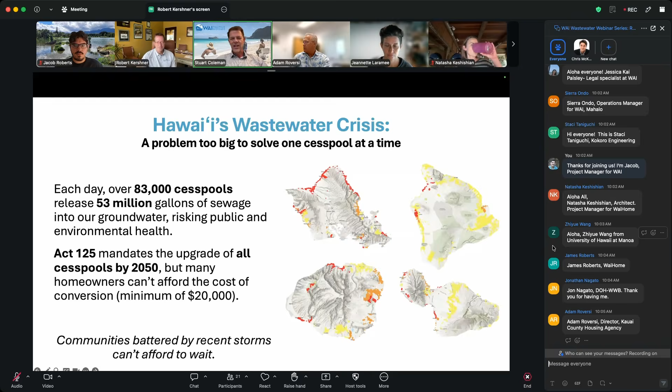Yeah, thanks so much, Stuart, and thank you just for the opportunity to present today. As Stuart mentioned, I grew up on the Big Island, so it's really special to be able to be here and just to share some knowledge and learn from you all as well.

So Rob and I at Innovatreat, we've been collaborating for the last couple of years on a project in North Dakota, the Teddy Roosevelt Presidential Library, which just opened up about a month ago.

Sherwood, the engineering company that I currently work with in San Francisco, we're the overall civil engineer for the project. So we led all of the site stormwater and also the design of the on-site wastewater treatment system.

And then Innovatreat supplied the in-building MBR system, which Rob will explain more about in the next several slides. At this project, all wastewater generated on site is treated to a level that can be safely reused, both within

The building for toilet flushing, as well as for irrigation around the site. And so, although this was developed for a much different context, obviously, than the situation in Hawaii, this type of

Treatment system is also very applicable for small communities that don't have access to larger municipal sewer systems.

So this is very similar to all of the small towns across Hawaii that are currently grappling with how to afford replacing over 80,000 cesspools. Can you go to the next slide?

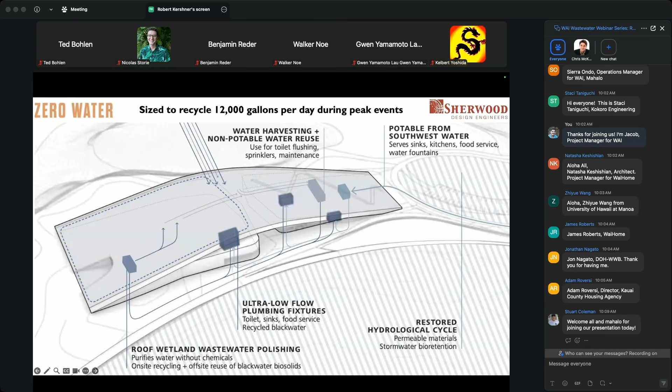As project site civil engineer, Sherwood designed all of the stormwater management and bioretention systems at the exterior of the building, including the green roof over the top. This was to enhance the site's natural hydrological cycle and really emphasize infiltration rather than runoff. We also partnered with Innovatreat to design the on-site water reuse system.

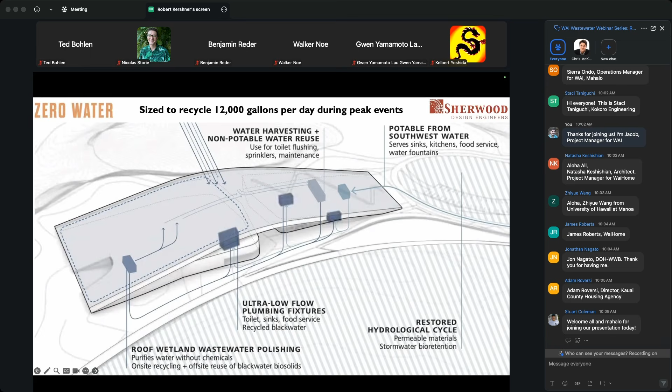All of the building's wastewater is collected and treated on site to disinfected tertiary recycled water standards, which is the highest level of effluent quality. It's then reused for toilet flushing within the building as well as for irrigation. Overall, this integrated treatment system is projected to reduce potable water demand of the library by over 50%.

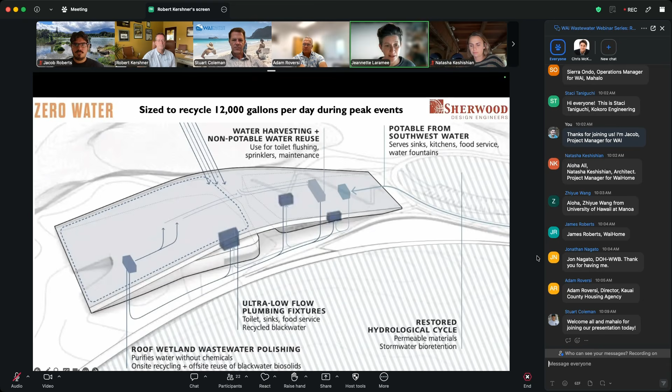And now I will hand it over to Rob to get into the details of Innovatreat's offering. Okay, thank you, Jeannette. Just to quick summarize who we are: we're based in the Baltimore suburbs. The technology, the MiniMBR as we call it, we developed over the last 15 years.

Strategically, it was developed to treat to super high levels of nitrogen and phosphorus removal because the Chesapeake Bay has been hampered by excess nutrients for decades. The state of Maryland passed regulations and, lucky for us, supplied funding, which I know you guys have been struggling with. One of the key factors to our significant success in reducing nitrogen and phosphorus was the funding mechanism.

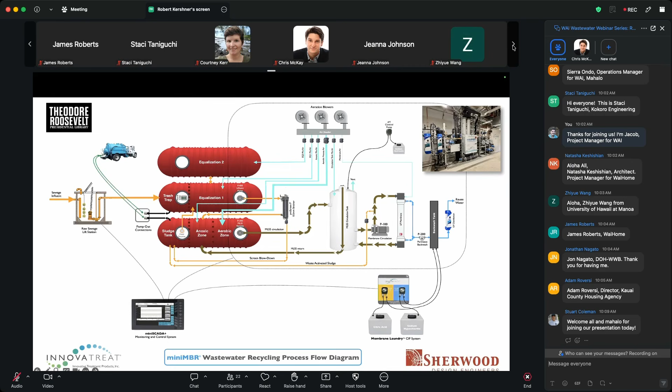All of the systems, the power, everything is minimized to meet the living building challenge that Jeannette described. We're talking about a system that draws maybe 5 or 6 kilowatts of power while it's operating.

So I threw this slide in because I want to very quickly explain for those who aren't wastewater nerds like myself, and I hate to say, Jeannette, you're a nerd too, along with me. We get excited about this industry and this business, but you can hit me later if you don't like that wastewater nerd conversation. We'll take that up over a beer.

It's clean, don't get me wrong, it's pretty clean. Most big municipalities do it this way. Some provide sand filtration or some other sort of filtration on the back end. It's what most municipalities do.

But when things are upset, when the bugs aren't happy, when toxicity hits for some reason, you end up with excursions in the effluent quality. So the whole point of doing water reuse is guaranteeing high level of treatment, and that's why the selection for a system like this incorporates a membrane, a permeable barrier to separate the effluent.

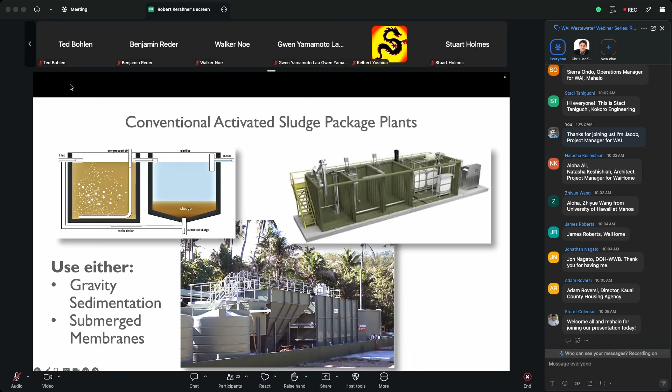My personal experience is that when we're working with developers, when we're working with homeowners, they don't want that in their backyard. It's just kind of an eyesore.

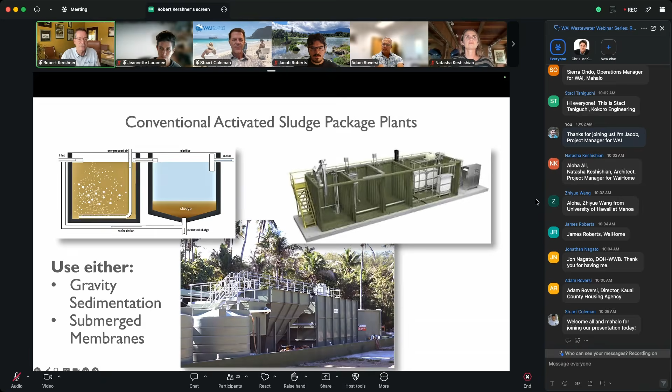Key to the technology, though, is in fact the membrane. And the membrane is also the, we'll call it, potential weak spot in the system, because if the membrane permeability, the amount of water that can actually pass through this membrane, if that fails or fouls, you'll get no water out. The flip side of that equation is all of the water that does pass through is really clean water.

So what we've done is we've taken a unique approach to the separation step in our process, and we've basically gone back to the roots of the early technology developed for industrial separation. This is a membrane, but not a typical municipal membrane. We took a robust industrial membrane that was originally designed for industrial waste separation, including oily, greasy waste, and repurposed it to separate the bacteria that we're talking about.

Big plants couldn't justify this because of the relatively expensive cost of this type of membrane. But in small plants that we're talking about, the membrane is a small portion of the overall project. So getting the more robust membrane that lasts longer and can take more abuse is a huge advantage to the longevity and the operating costs and experience in the plant.

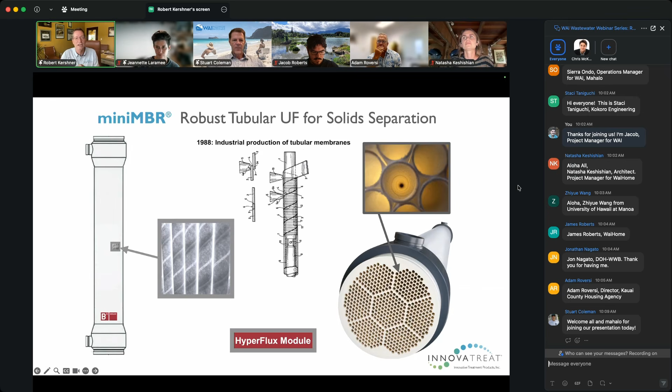So basically, we're talking about the separation being the most critical step. What we've done is we've extracted the membrane from the rest of the tanks, and that's why we're able to configure the plants in a very attractive manner, but also in a much more efficient manner. So this slide describes the layout of what the typical systems look like.

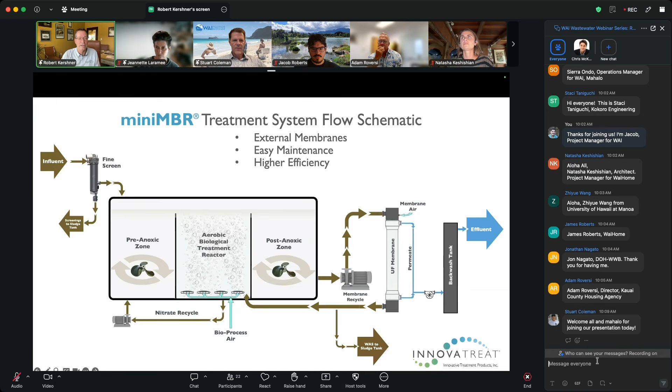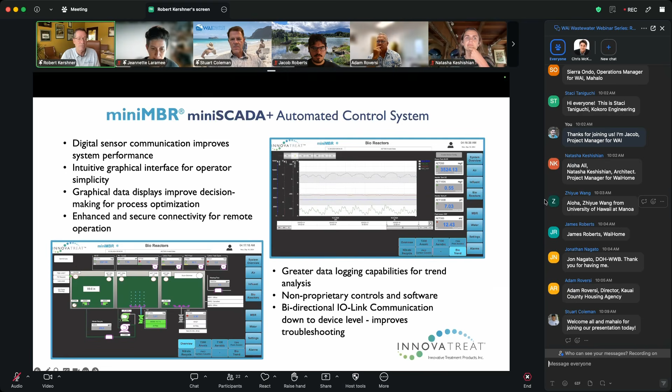All of our systems, and frankly, all modern wastewater plants require some level of automation and controls. Our systems utilize an open architecture Linux-based system, which if you're a computer geek, you'd understand is non-proprietary computer technology. That means it's not going to be obsolete in 10 years requiring software upgrades. All of that is taken out of the equation by addressing it with a non-proprietary Linux-based computer control system, which is what we've done.

Our systems are built in the factory right over my shoulder here, and that's actually a unit in the test bay that'll do up to about 30,000 gallons a day. You can see the two towers in the middle — those are the membrane modules. All of the equipment, the pumps, the blowers for adding oxygen air to the biological reactor, the controls, the membrane cleaning system, which is all automated — we call it our membrane laundry — all of that is incorporated in a pre-engineered, pre-tested, prefabricated skid system.

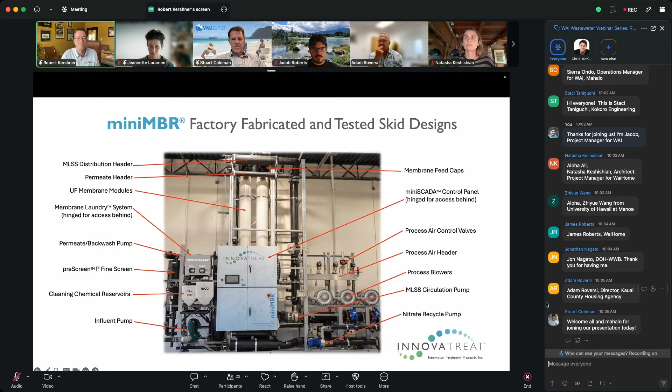We build these systems, especially for these smaller projects like the decentralized ones we're discussing here, with some unique features because we understand they're going to be remote. We understand they're going to be visited by, let's call it, a circuit rider type operator. We don't have a staff of 20 people running the plant 24/7 like a municipal plant. We don't expect that, so we need the automation to allow the plant to run 24/7.

But when a blower fails or a pump leaks, we want to be able to service them quickly. So we'll have a shelf spare sitting in the room, made to be very easily and very quickly swapped out with very simple tools. Within an hour of any piece of equipment having a problem, the system is back up and running. Of course, you get the alarm, you get the text message, and you're back up in operation in very short order.

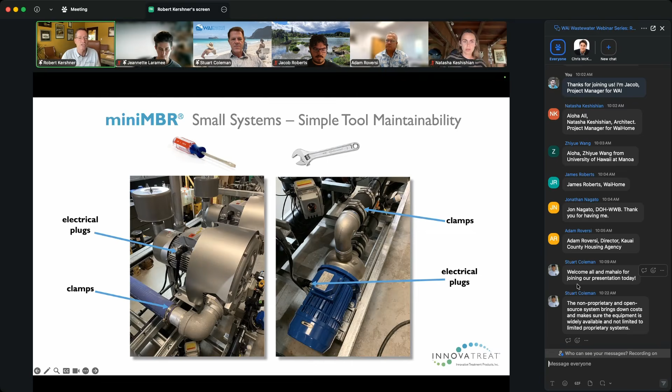So the systems that we build can be configured in a number of different ways. You've seen the pictures of the one at the Theodore Roosevelt Presidential Library, but if we were building a plant behind, say, a warehouse or in the corner of a shopping center, we could deliver it in something we refer to as a package plant.

Now, our package plants are built by us, however the fabricated structures are fabricated for us on the West Coast out of a technology called foam core fiberglass construction. This construction method is pretty slick in that it's corrosion resistant because it's fiberglass. It's built in the method that mega yachts are built — a foam core vacuum resin transfer method of fabrication. It's pretty slick because it's a monolithically cast structure that is insulated and can withstand winds up to 160, even 200-mile-an-hour winds if we want. But we typically design for a standard 160-mile-an-hour wind.

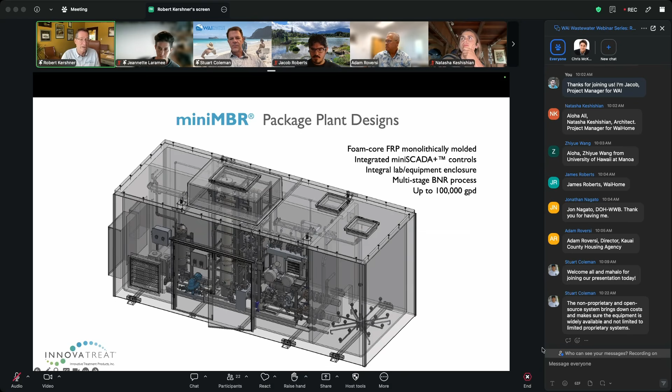In fact, we're building a plant right now for the city of Galveston. They have a park on an island in the Gulf of Mexico that's been hit multiple times with hurricanes, and we're building a special hurricane-proof version of one of these package plants for them right now. This is what one would look like.

They're not very heavy because they're not made of steel. That thing right there that you see is about 25,000 pounds. If that was a steel package plant, it would be subject to corrosion and require painting, and it would weigh double or triple that. So it's fairly easy to handle, fairly easy to set and hook up, and corrosion resistant.

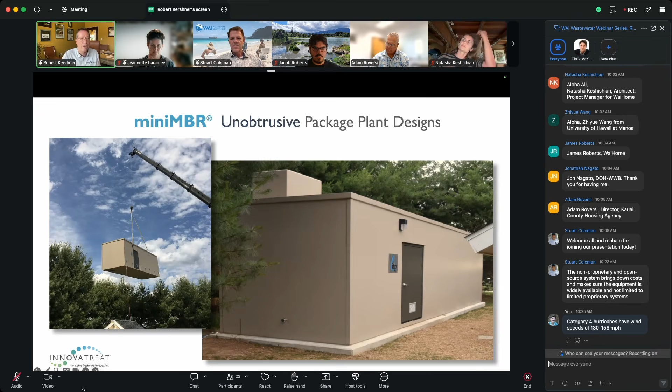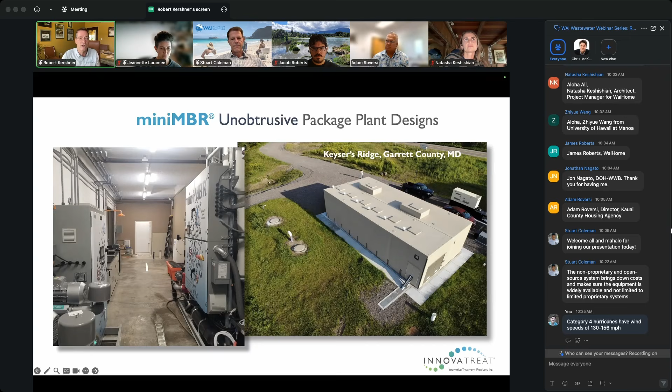I'll show you a couple of examples. That one right there will handle 50,000 gallons a day. That's a pretty large fiberglass structure, but in actuality that entire structure takes up a 50 by 25 foot space, that's it. The underground tanks behind it, where you see the manhole covers, are the equalization and sludge holding tanks, where they pull a truck in and vac out the solids and send it to the big municipal plant 20 miles away.

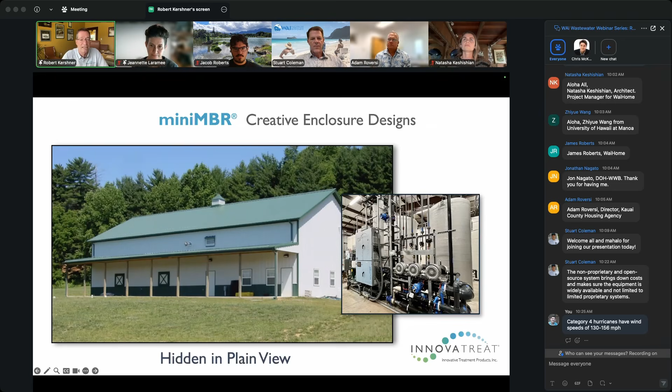This one, up behind that row of trees, is an old folks home that's been there for about 150 years — a huge mansion. All of their waste is treated inside that building, and you can see the tanks are completely sealed, with everything vented to the outside. That building right there treats 100,000 gallons a day of wastewater from a retirement community.

This one here is really pretty because it's just a simple shell. We dressed it up to look nice, but inside is a 10,000 gallon a day system that treats wastewater from a firehouse, where firemen are there 24/7, and a sports fields rest house for soccer, football, and lacrosse. This is located about halfway between Baltimore and Washington.

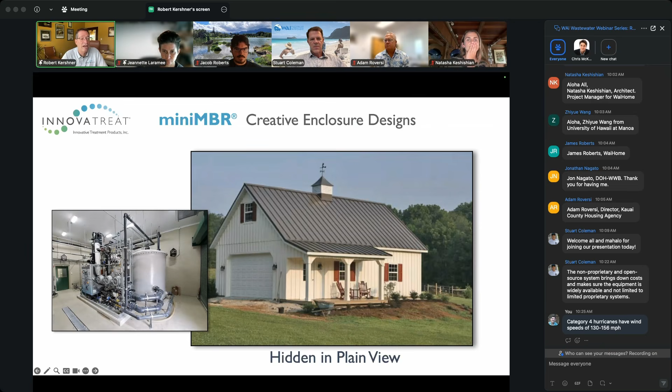We talked a little about treatment plant structures, but it would be very interesting if we clustered a number of homes and dropped small lift stations in where the cesspools are. They could be like an Orenco PreLoS STEP system and low pressure sewers, which could deliver solids-less effluent through effluent sewers directly to the treatment plant. It would eliminate a lot of the screening and initial mechanical equipment.

But if you had a grinder pump, we could handle that too. We have a screen system that could be integral into the system as well. Either one works beautifully. The advantage of this low pressure sewer system is you eliminate the deep excavation necessary for gravity collection systems and big pump stations. You can trench in small diameter, high density polyethylene pipe, one, two, three inch pipe, just below the surface. It's a much more cost effective way of doing it.

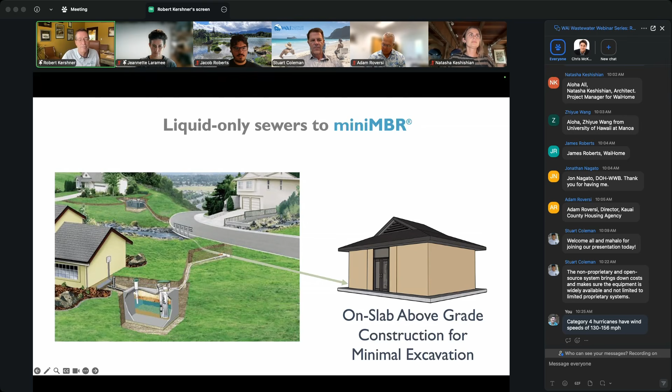We're not involved in that part of it, but it's a very complementary technology to ours. Why? Because we can deliver a system that looks like a little tiny home, frankly. We could dress it up with windows if you want. Basically that structure is two tanks, one tank having the screening, trash trap, sludge tank, and equalization tank. The other side is the biological reactors.

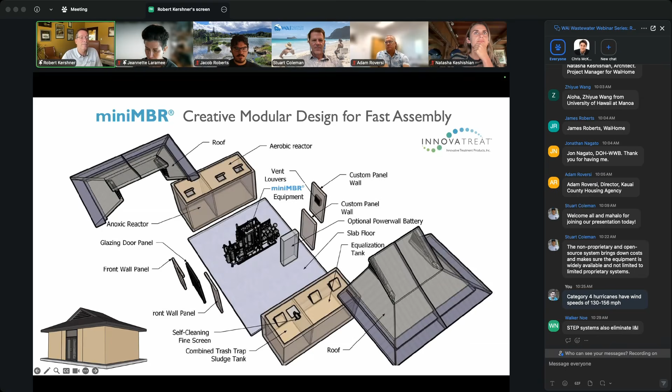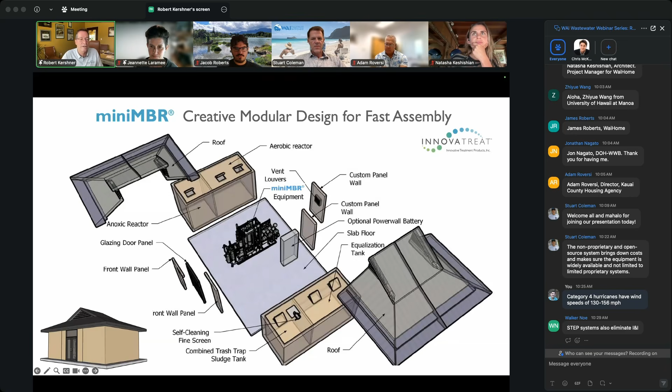Just to show you, we build bigger plants as well. This one is a 65,000 gallon a day plant that's been running since about 2019, direct discharging into the Chesapeake Bay. It's designed to meet total nitrogen below 3 milligrams per liter, extremely tight limits, and 0.3 phosphorus. We've been achieving about 1.5 total nitrogen for the last 6 or 7 years, and 0.03 to 0.04 phosphorus. Extremely clean water coming out of that.

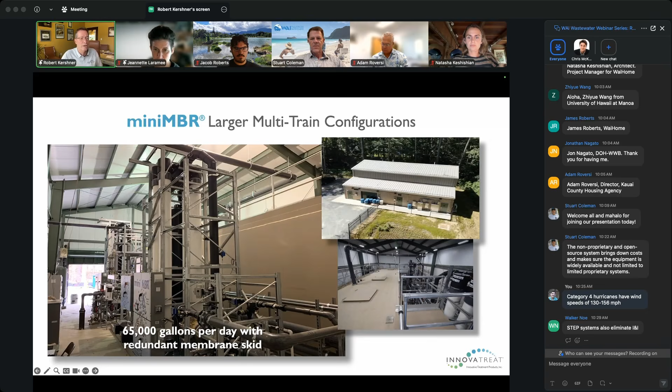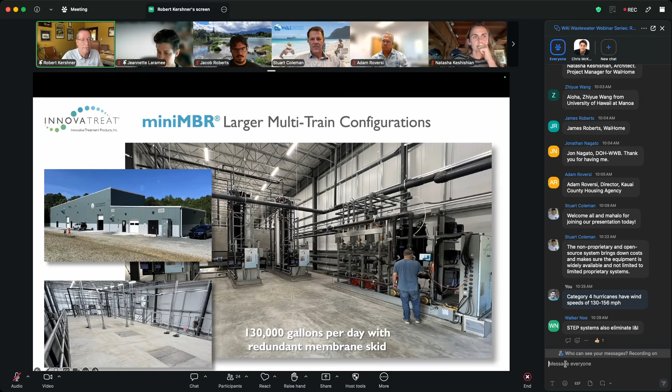The equipment is sitting right there next to the tank, as you can see. My friend Tim is pushing buttons on the controls - that's what the computer looks like. Very clean, very quiet environment, and it produces exceptional results. This one also has to meet 3 and 0.3, and it's meeting about 1.5 and 0.02 phosphorus for the last 2.5 years.

So in summary, the goals of the technology, in no particular order: we like that it's aesthetically pleasing. That's important, not only for the neighbors, but when an operator runs a plant that looks nice and clean, they tend to take better care of the equipment, and it runs better when maintained properly. We make it easy for them to maintain it - they don't get upset at it, take care of it, and it runs better, meaning lower operating costs.

We are capable of off-grid operation, which means we can run it on solar and batteries, if that was interesting to a customer and client. The membrane is an industrial membrane built to operate at 100 PSI internally, and we run it separating bacteria at 6 PSI. It is way, way stronger than necessary, and that's all in the customer's benefit.

Our oldest plants today are 10 years old. They're not looking to replace their membranes anytime soon, so we're expecting 15, maybe more years of life on these membranes. The maintenance, very easy to do. It's designed to be easy. We designed it with operators actually cooperating with us and with them in mind.

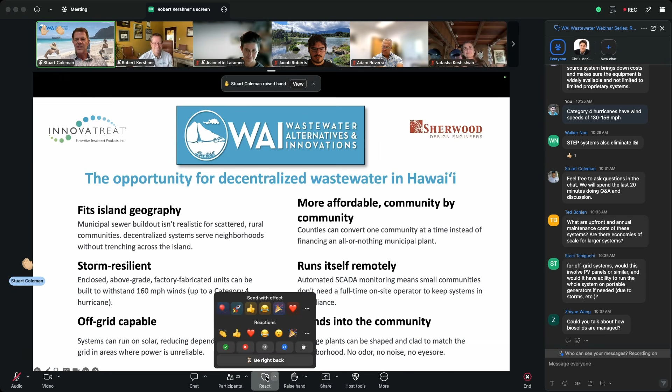Let's give a round of applause for these guys, and then let's open it up for questions and comments. We'll start with Ted's comment, and move into Staci's about what are the upfront and annual maintenance costs of these systems, which is hard because they're so variable? And are there economies of scale for larger systems?

I can answer that by saying there are always economies of scale. Just for a rough idea, a 10,000 gallon a day system and a 20,000 gallon a day system are pretty similar in price. The 10,000 has one membrane module, the 20 has two. The tanks get a little bigger, so it's almost an imperceptible difference in price.

There are breakpoints that are sweet spots, and the 20 to 30,000 gallon a day plant will treat something in the neighborhood of 50, 60 homes. So that is a sweet spot. Beyond that, it doesn't go dramatically higher. You can go to the next level and it's maybe 30, 40% more, but you're doubling the flow.

So we're talking about the equipment in the $1 to $3 million range, for a rough idea, up to about 100,000 gallons a day. That's a lot of homes, and then the construction might add another million to two to that, depending on what kind of work has to be done, slabs and buildings and the sewers and things like that.